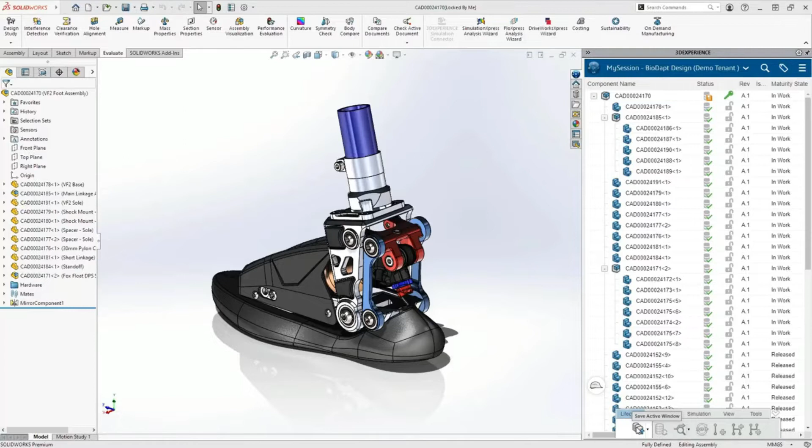What's critical is to have one that's engineering aware, one that understands the relationships between drawings, parts, and assemblies. With the 3DEXPERIENCE platform, document management is integrated in Solidworks. When you're ready to add your design, just save it. You can organize the data however you want and access it from any web browser, making part numbers, descriptions, and previews available to the whole business.

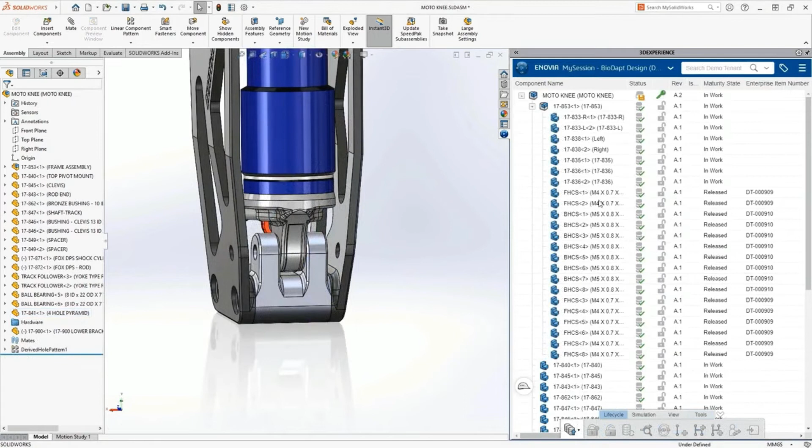Understanding the impact of a change and capturing the revision can be challenging to say the least. For more and more companies, a revision note on a drawing just doesn't cut it anymore. You need access to powerful where-used capabilities that help inform decision-making about the impact of the change. And when a change is required, you'll have the confidence that the old revision can be retrieved at any time.

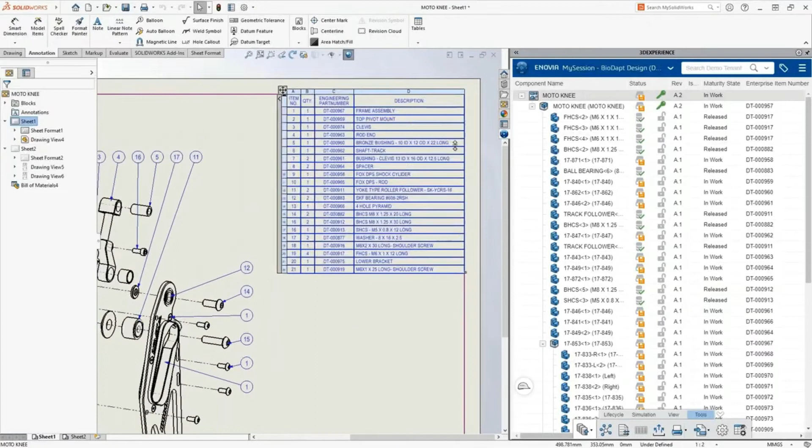The one thing about product development that no one likes is the bookkeeping. Pulling part numbers, filling out title blocks, creating PDFs, it all takes a lot of time. You need tools that automate common activities like creating part numbers that are automatically added to the bill of material, and creating common deliverables like PDFs, all so you can stay focused on what you love, innovating.

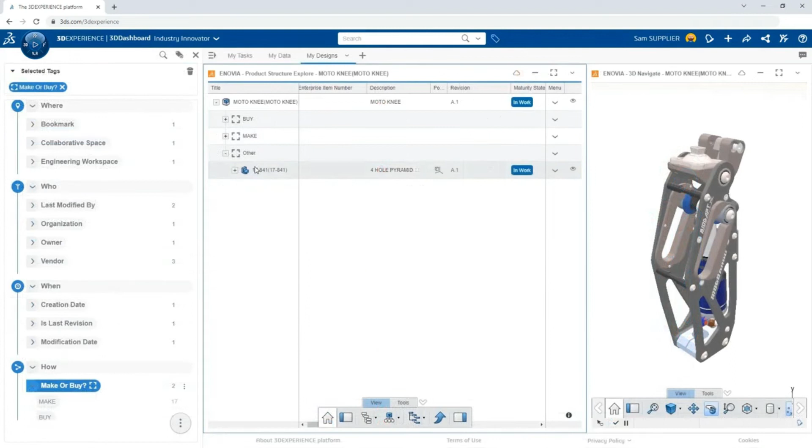With the 3DEXPERIENCE platform, anyone in the company with the right permissions can easily search, find, and consume product data. It's easy to see the status of design components as well as who owns them. And users can contribute directly to the product definition by updating design properties, even if they don't have Solidworks.

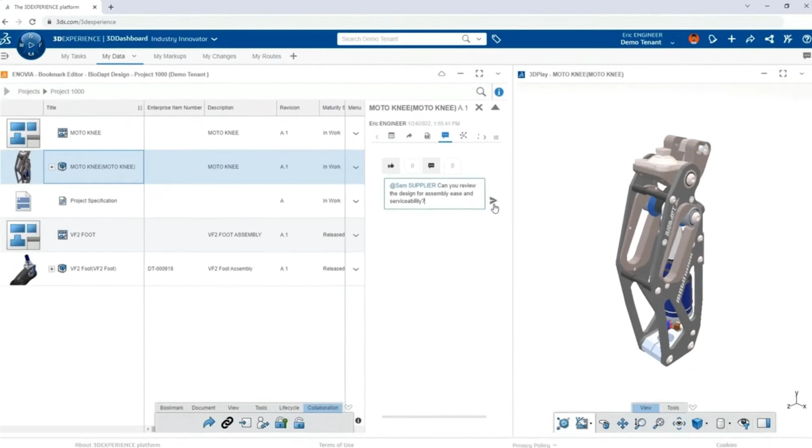Modernizing your product development process requires moving beyond email and phone calls. You need tools that allow you and your team to simply be @mentioned directly on the model in question. No email threads, attachments, or lost history. When the conversation needs to be more immediate, integrated chat and screen sharing expedite design feedback.

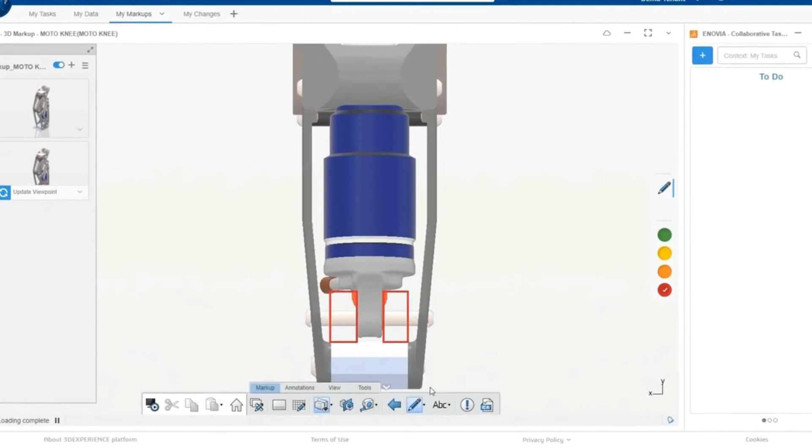3D is the tool for visualizing and developing products, so it only makes sense to extend the benefits of 3D to everyone in the organization. Digital markup in a browser allows new ideas to be sketched directly on the model, and annotations can be added to further convey intent. And the best part? The final markup is accessible directly in Solidworks.

Action and accountability are important elements of any product design process, and tasks are a convenient way of achieving both. Assignees, descriptions, and due dates can all be included in an easy-to-use interface. Status can be tracked through a dashboard, and supporting content can be easily dragged and dropped onto the task. Whether you're on the web or inside of SolidWorks, it's easy to access the task and execute the activity.

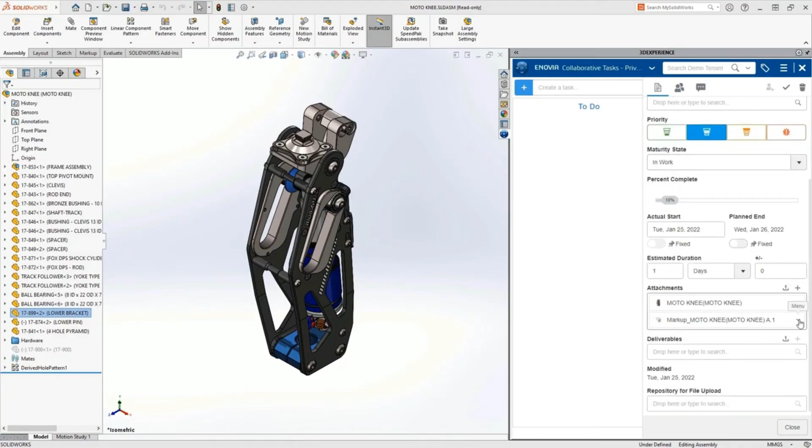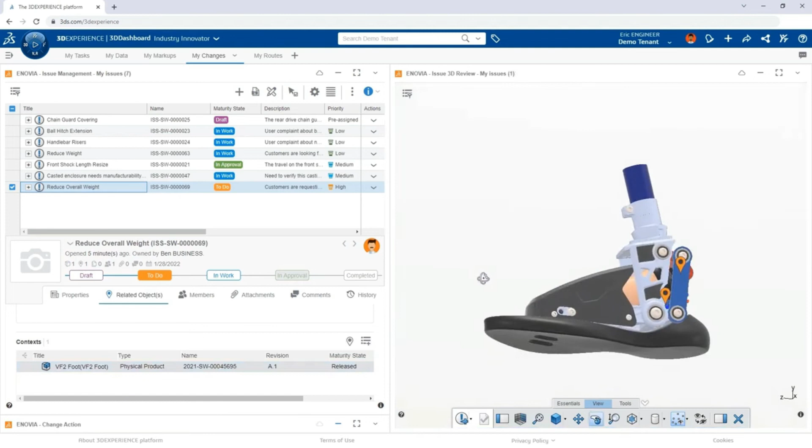Whether it's the next big idea or a challenge from the field that needs to be addressed, having a formal way for anyone in the company to capture feedback is crucial. Issues are a powerful tool for capturing, prioritizing, and processing incoming requests. Feedback can be associated directly to model data and visualized for clarity with a simple drag and drop.

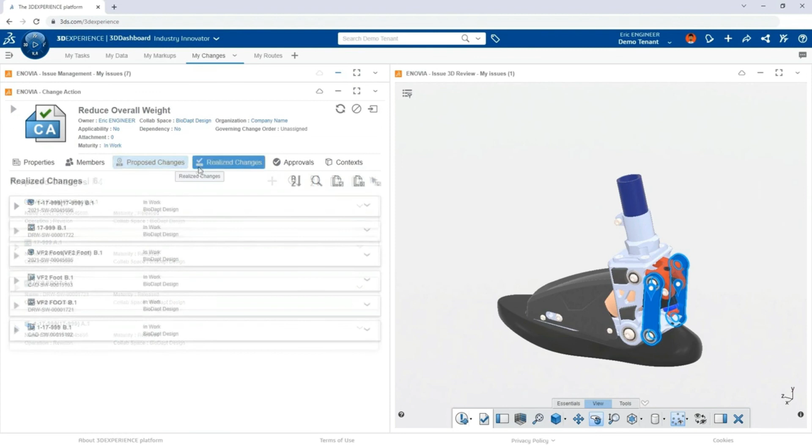Let's face it, not every idea is a good one, and not every request for a change is actionable. But for those that are, you can transition issues directly to a change action with a single click. Assignees can be added, impacted designs attached, and starting revisions automatically generated. And in the end, full traceability of everyone's approval.

With fast deployment, powerful tools, and the flexibility you expect from the cloud, the 3DEXPERIENCE platform is the key to modernizing your product development process.